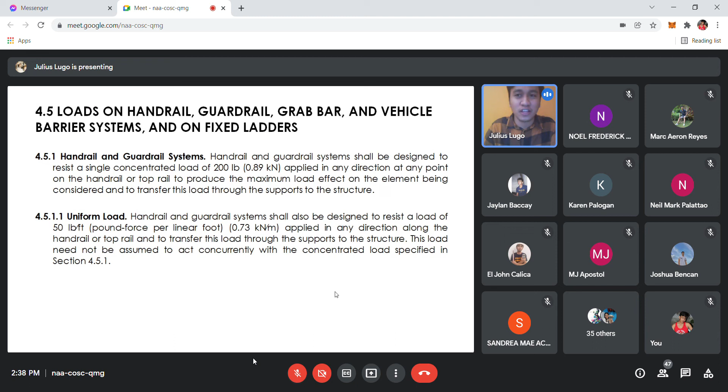Grab bar, mga ganyan. Okay, meron tayong exemption guys. May exemptions tayo. Hindi porket may handrail na yan, yung bahay ninyo, mag-uniform loading na kayo. Wag naman, okay, wag naman.

Okay, so the exemption is yung occupancy ninyo is 1 and 2 family dwellings lang, especially pag bungalow. Kung bungalow naman yan, wag na kayong mag-live load kasi makakamahal lang kayo.

Another thing is factory, industrial, and storage occupancies in areas that are not accessible to the public and that serve as an occupant load not greater than 50.

Have you ever been to S&R? Sino na nakapunta ng S&R? Landers. Oh okay, wala pa nakapunta ng S&R guys. Who knows what S&R is? It's like a shopping or like maybe grocery center, somewhat like that. Pero yung mga binibenta nila is kind of foreign, kumbaga imported goods, mga ganyan. So doon makakabili ka ng Twinkies, makakabili ka ng mga much cheaper version ng Nutella, mga ganyan. Kasi sa mga malls, actually, sobrang mahal ng Nutella. Pero yung doon, sobrang lalaki ng mga Nutella nila, mga ganun, isang galbanan guys. Yung ginagamit talaga, parang wholesale siya na center. Pero membership shopping siya, you just have to pay like 750 ata per year, annually. Pero you can enjoy na yung effortless na shopping and gano'n. So, nagkakaroon, nag-consider, nag-endorse. Ayun.

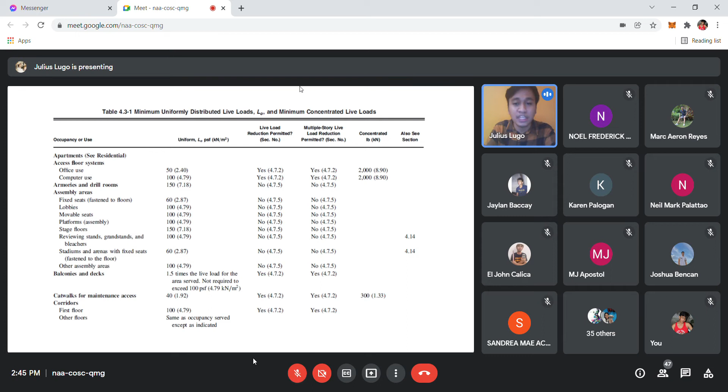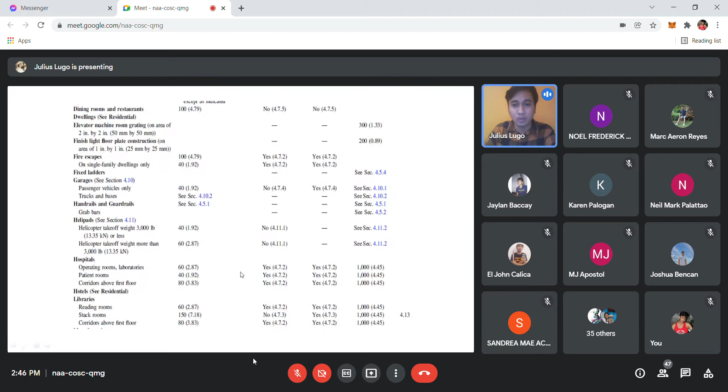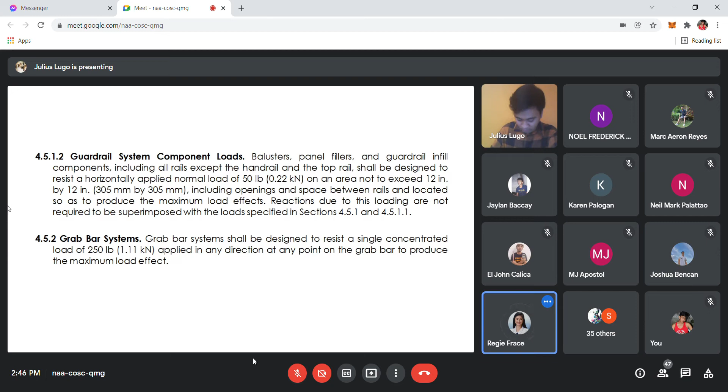Now, for the guardrail system, our component loads include balusters. What do we mean by balusters? Does anyone know? Reggie, what do we mean by baluster? Sir, as I know, balusters are like the handrails in a house. Okay, that's technically what Reggie knows - it's part of the handrail. But as I drew earlier in the stairs part, balusters are actually the small columns supporting the handrails. Those are balusters - part of the handrail or guardrail system.

Then we have panel fillers and guardrail infill components, including all rails except the handrail and top rail, which shall be designed to resist a horizontally applied normal load of 0.22 kilonewton.

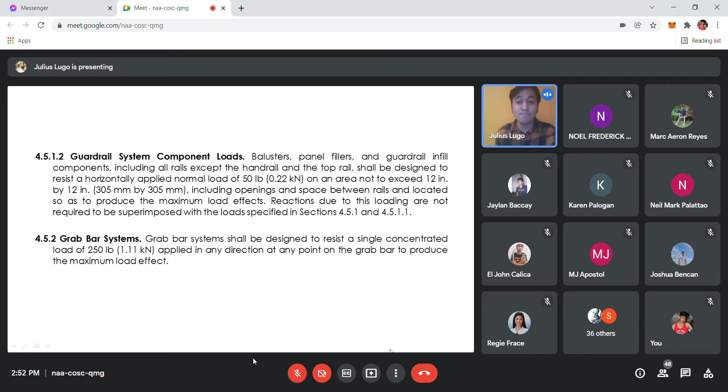So for the grab bar system, it should be designed to resist a single concentrated load of 250 pounds, applied in any direction. This is on top of the 0.73 we mentioned earlier in my drawing. Remember, it should be able to withstand 1.11 kilonewton concentrated live load, applied at any direction, at any point, that produces the maximum load effect.

So we have vehicle barrier systems. Let's just pass through this topic, guys, because we won't be including it in our case study later or in our design. We won't be using the vehicle barrier, because if you were to design your structural framing, we're not going to place a vehicle barrier there. Let's not make things harder for ourselves. Besides, the details not mentioned here...

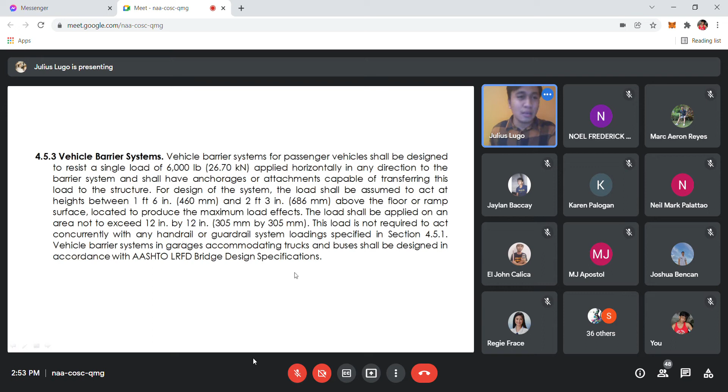Okay, how about fixed ladders? Fixed ladders with rungs shall be designed to resist a single concentrated load of 300 pounds.

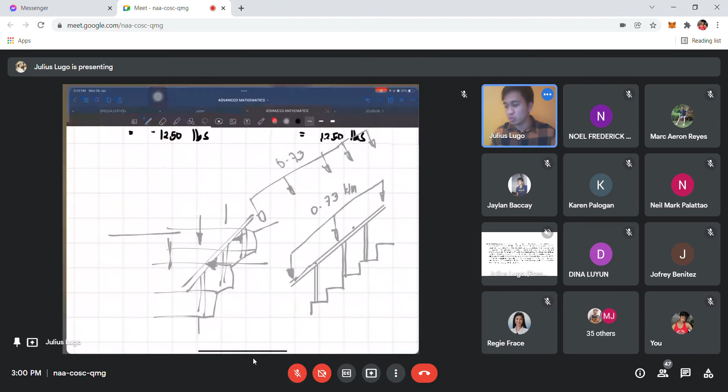I don't understand what... Oh my God, I don't understand what you're saying. Going back, I hope you guys can see the screen now.

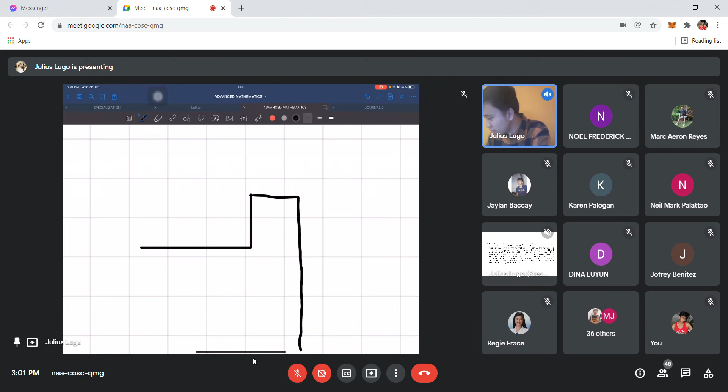I'm going to draw here the section of the building - just a particular section, like the building's balcony. This is the elevation plan. Your stairs, or what you call the ladder, is fixed somewhere here, like that, somewhat in nature.

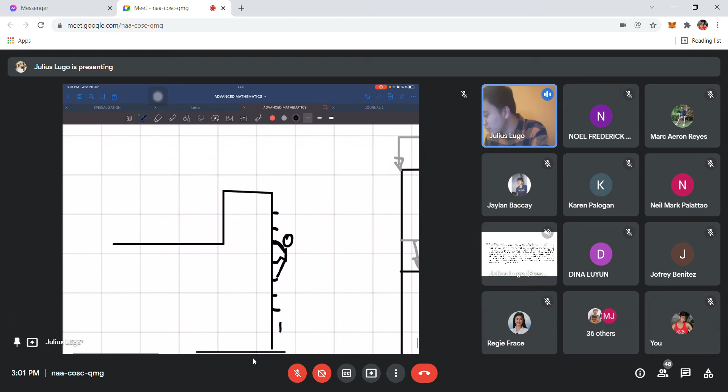For example, here's the person standing like this, holding on here. The railing is somewhat on the side, and then like this. This is what we call the extension of the railing.

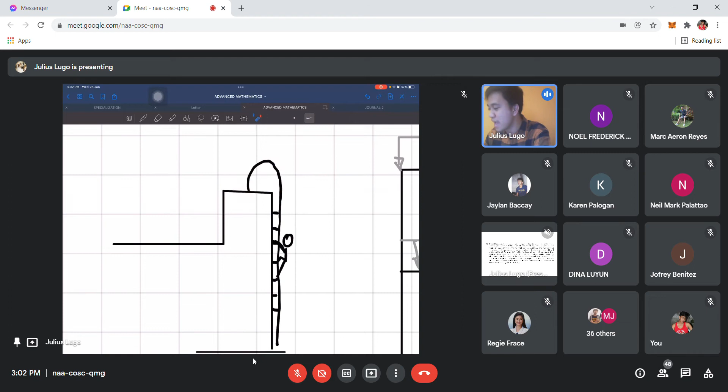This part should be designed to withstand our 100 pounds. When it comes to this other part, that should withstand the 300 pounds concentrated live load.

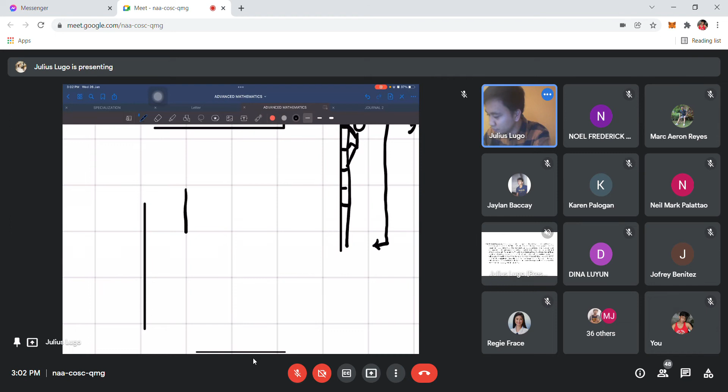Going back to treads and rungs - if you encounter a ladder like this. Let's make it 3D - it doesn't look 3D though.

So somewhat like that is the ladder. The rungs we're talking about look like this - like that. Those are the rungs.

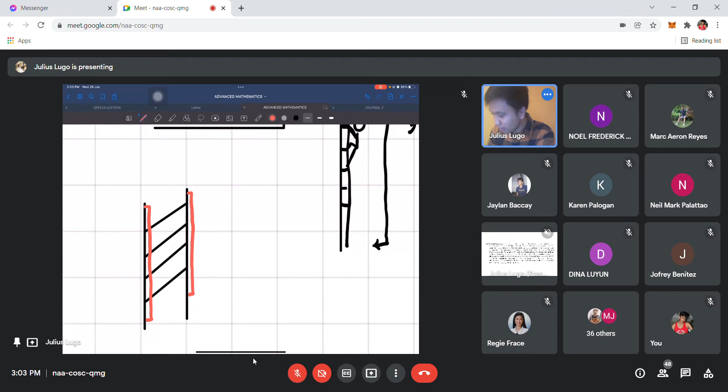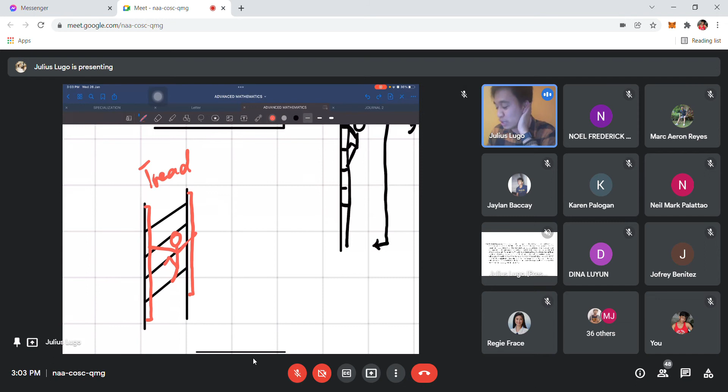Do you guys understand the drawing? So this is your tread, and the circular one earlier is the rung - it's like a ring. So that's your tread and rung.

Moving on, let's continue. Let me just resume presenting. I hope you guys are learning, kahit paano.

Later on, when we do structural analysis, we don't manually input and compute these loadings - it's the software that computes for the loading given this particular condition. We just select which building code to use. That's the good thing about technology nowadays.

Oh my God. So anyway, I hope you can see the screen already. It's 3:04, we're almost done, don't worry.

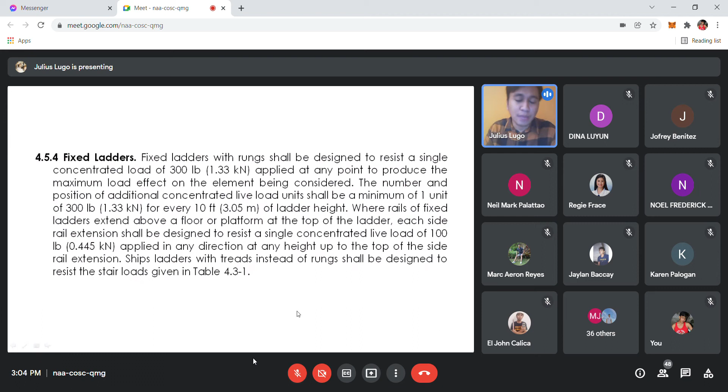Impact loadings - what are these? These are loads that cause sudden vibration. When I say sudden vibration, I'm not referring to the live load. Impact loadings are, for example, bombs or a gas explosion - those are actually impact loads.

So of course, we give allowances for impact loadings - the live loads are multiplied by a certain factor to get the impact loading. Our provision is, if it's a machinery, there's a chance that if we lift or move it, it might be dropped.

So that will actually cause impact loading. Ngayon yung machinery natin, pwede tayong multiply ng 20%, rather mag-add ng 20% on top of the original weight, okay, that is to account for the impact loading.

And then yung machinery natin, reciprocating machinery natin or power-driven units, pwede natin i-factor siya, multiply tayo ng 1.5, okay, to give allowance or ample consideration to the impact loadings. Just in case yung mga malaglag, mga ganyan, or mga pumutok, of course, we have to take note of those.

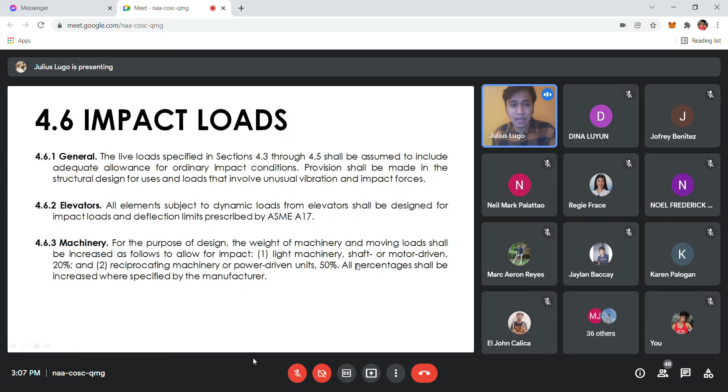Okay, so elements supporting hoist or facade access and building maintenance equipment. Lahat ng structural elements of the building maintenance equipment shall be designed for a live load 2.5 times. I-amplify natin yung 2.5 times na rated load ng hoist, or the stall load of the hoist, whichever is larger.

Now, fall arrest and lifeline anchorages, these are actually safety materials, or tawag dito, safety features, especially in construction. Alam nyo guys, yung pinagtatalian nila ng mga safety line nila kapag sasabit sila, mga ganon.

Pag sasabit sila dun guys, di ba syempre meron silang protective equipment, tapos dun sa anchor, tatali nila doon yung kanilang chain, tapos magkakabit sila ng bintana sa third floor, mga ganon. So parang sabit-sabit sila. Ngayon, itong fall arrest na to and lifeline anchorages, those are those safety facilities.

Ngayon, itong fall arrest and lifeline anchorage should be designed, guys, for a live load approximately 13.8 kilonewton for each of the attached lifeline. Ngayon, it is the duty of the safety engineer to check kung ilang lifeline yung nakakabit dun sa anchor na yun.

Kasi baka malay mo, that anchor is actually specified lang to accommodate 3 lifelines, okay? Pwede lang magkabit ng tatlong lifeline doon and then sasabit yung tatlong tao.

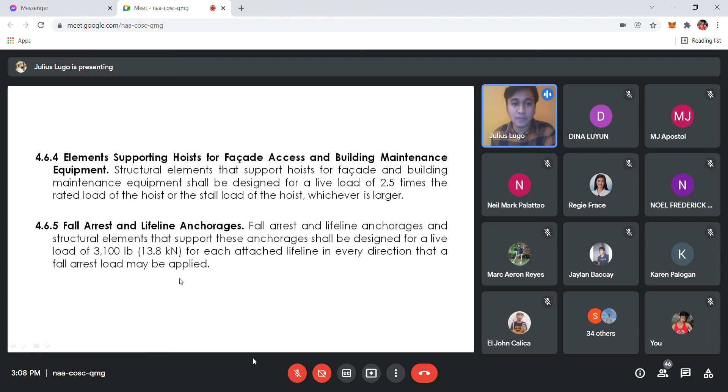Okay? So reduction naman tayo. Meron tayong reduction. Kanina, in table 4.3-1, pwede natin i-reduce yung ating live load and concentrated load. So how do we actually reduce the concentrated live load and the uniform live load? This is how you're going to reduce.

Itong formula na to, gagamitin mo to sa lahat ng live load except yung roof uniform live loads. Okay, take note. Meron tayong separate formula for the roof uniform live loads. Yung reduction ng ating uniform live loads is subject to limitations of 4.7.3 through 4.7.6.

Members for which a value of KLL or AT is 400 feet squared or 37.16 square meters or more are permitted to be designed for a reduced live load in accordance with the following formula.

So first, okay, in computing for the reduced uniform live load, i-check nyo muna yung value ng KLL or AT, product ng KLL and AT. If the product of the KLL and AT is actually equal to 400 square foot or 37.16 square meters or maybe greater than that, pwede kayong mag-reduce ng live load ninyo. Pwede nyo gamitin itong formula na to.

Ngayon, itong 4.7-1 na equation, that's for the British system. Gagamitin natin, SI unit is itong pangalawa. Okay, so L equals LO multiplied by 0.25 plus 4.57 over square root of KLL multiplied by AT. Okay, so ito yung SI na formula.

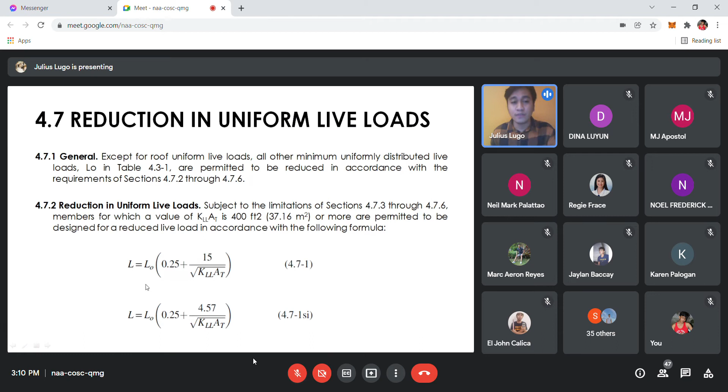Ano ba itong KLL and AT na to? Yung KLL mo, ito siya, live load element factor. Tapos yung AT, A sub T, that's your tributary area. Yung KLL mo, pili ka dito kung interior column ba siya.

Okay, if the structural element supporting the particular live load na gusto mong i-reduce is an interior column, you have to use KLL as 4. Okay? If that particular live load that you want to reduce is actually supported by exterior columns, that is your KLL should be 4.

Now, yung computation ng tributary area, hindi ko na siya i-discuss dito. Kasi the tributary area, what do we mean when we say tributary area, guys? Anyone who knows what the tributary area is? Perhaps I can ask someone. Si Carl na lang, Dominic. Carl Dominic, what is tributary area?

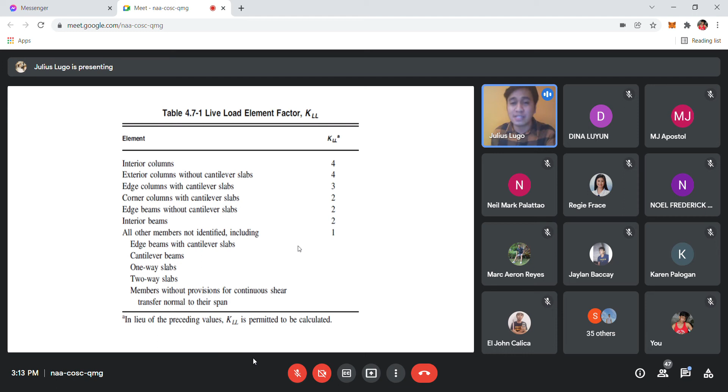The beam, there's a specific area that is being supported by the beam. Hindi lahat ng ceiling mo sinusuportahan ng beam. Hindi ganyan, guys. So yung mga side beam mo, malamang yung mga nandun lang sa malapit sa kanya, yun lang yung mga sinusuportahan niya. So those are your tributary areas.

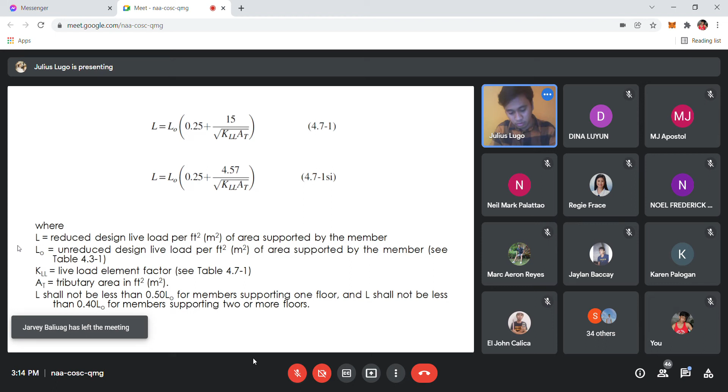Ngayon, upon computation of the reduced live load, hindi agad yon yung ilalagay yung live load. Kumbaga, pagkatapos nyo nag-compute ng live load, i-check nyo muna. You have to check first.

Now, upon computation ninyo ng L, you have to compare the value of the L with 0.50 of the LO. So, L should not be less than 0.50 for members supporting one floor. And L shall not be less than 0.40 for members supporting two or more floors.

So, there are some columns kasi na although 3-story building siya, yung column na ito, ang sinusuportahan lang niya or hangganan lang ng column na ito is hanggang sa second floor. So, yung mga ganyan guys, mga ganun na type ng column, hindi siya full force. Meron din mga column na although 3-story yung building, first floor lang yung hangganan ng column na yon.

So, you have to check. If your column only supports one floor, then you have to check the value of the LO or 0.50 LO, and compare that with L. Ngayon, if your L is less than 0.50, ang gamitin mong LO or ang gamitin mong value ng reduced value ng inyong live load is the 0.50 LO. Same goes with this particular value, the 0.40. Okay, so that is how you're going to check the reduction factors or the reduced equation.

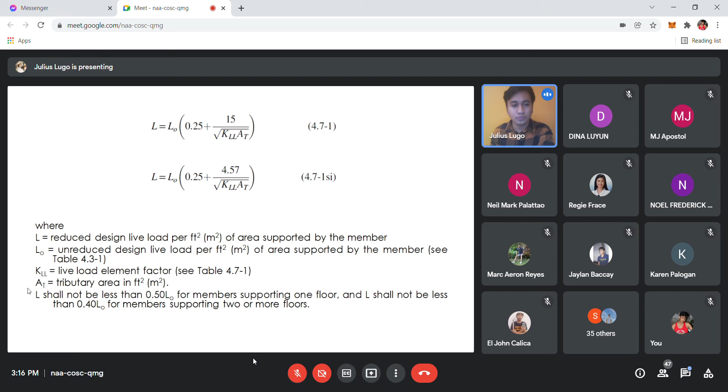Meron din tayong heavy live loads. Yung mga heavy na yan, those are somewhat heavy. Hindi kasi na-specify sa code guys kung ano yung mga heavy live loads na to. Perhaps it is vehicle, ganyan. Pero may separate provision kasi yung vehicle. So hindi na separate kung ano yung mga heavy, hindi na specify kung ano yung heavy live loads na ito.

Pero in the case of heavy live loads, ang nailagay lang is that yung mga live load na greater than 4.79. So, hindi na i-specify kung anong type siya, is it a machinery, is it a vehicle, hindi siya na-specify. So, ang in-specify lang is yung loading. Heavy live load daw siya kapag ang live load ay actually greater than or equal to 4.79. If your live load is 4.79 and above, you don't have to reduce it. There's no reduction that's going to happen. Retain nyo yung live load na yan.

Meron din tayong exceptions. Live loads for members supporting 2 or more floors are permitted to be reduced by a maximum of 20%, but the reduced live load shall not be less than L as calculated in 4.7.2. This formula. So you can reduce the live load for members supporting 2 or more floors by 20%. Multiply mo na lang ng 20%, but it should be in accordance with the provision of section 4.7.2. It should not be less than L using yung ating formula.

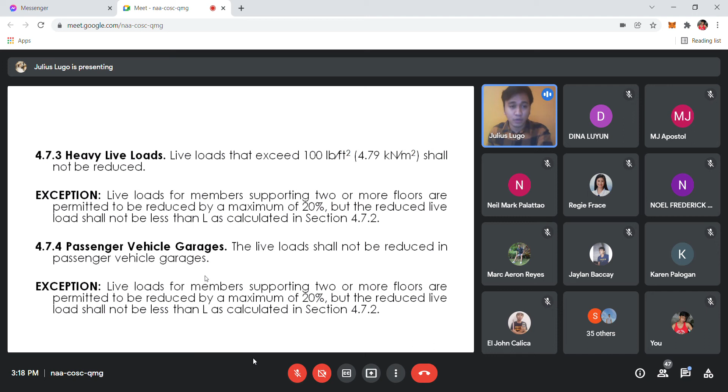Next, passenger vehicles. We will not be discussing the passenger vehicles anymore because we will not be having vehicles naman for our structural modeling. Assembly, okay, kahit wag na yan.

One-way slab and two-way slab. Have you encountered one-way slab and two-way slab? Have you encountered one-way slab or two-way slab already? Hindi niyo pa na-encounter guys ang one-way? Wala pa kayong na-encounter na, o may narinig na ba kayo? May narinig na ba kayo na one-way slab and two-way slab?

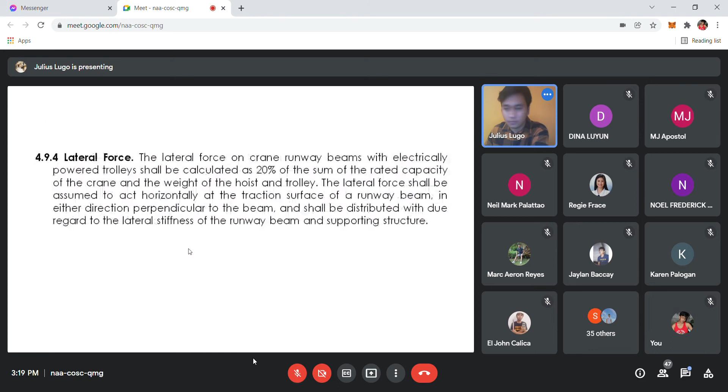Ang dami pa pala nito. Okay, anyway, papasadahan lang natin yung iba. Okay.

Okay guys, yung one-way slab ay yung mga slab na there are only two beams supporting both sides, dalawang beam lang. Two-way slab naman siya kapag lahat ng sides ng slab na yun is supported by a beam. So pag one-way, two sides lang yung may support; pag two-way, lahat ng sides ng slab ay may support, may beam siya.

So the tributary area for one-way slab shall not exceed an area defined by the slab span multiplied by 1.5 times that slab span. So that's L multiplied by width, which is 1.5 by 1.5 multiplied by the L itself, the length. Yun yung limitation on one-way slab, yung tributary area.

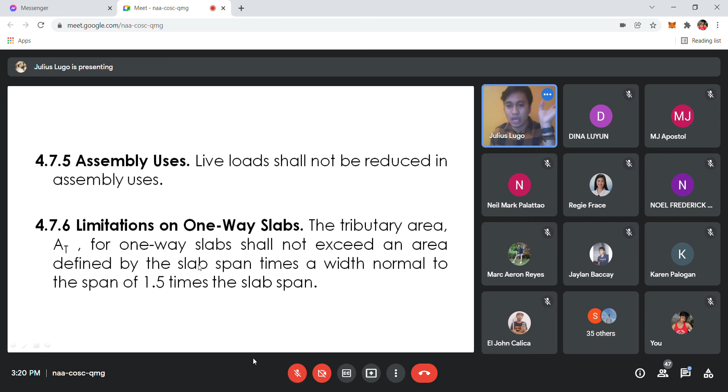Okay, so meron tayong reduction for roof live loads. Minimum uniformly distributed roof live load should be in accordance with table 4.3-1, and can be reduced with the requirements of section 4.8.2.

Okay, so pwede tayong mag-reduce ng live load for the roof. Pero kung your uniform roof live load ay na-reduce ng approximately or less than 20 pounds, pwede yung roof live load na yon - for example if you're going to reduce it to 20 pounds or 0.96 kilonewton per square meter, in order for you to make easy calculation.

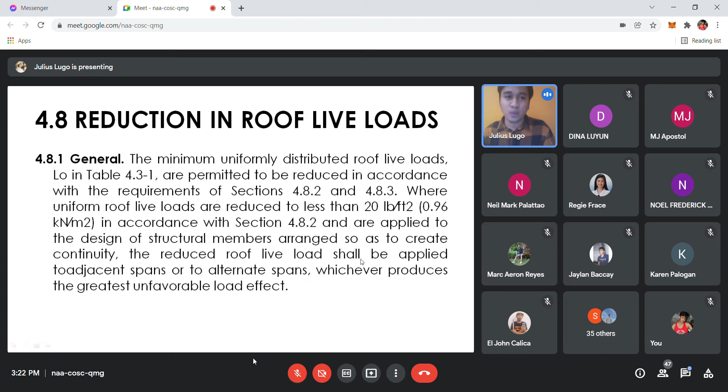Kasi sobrang dami, di ba, if you're going to calculate roof live load for this particular building, yung roof live load na yon at that specific purlin and truss member, pwede niyo siyang copy-paste na lang sa mga susunod na member, regardless kung ano yung form o shape ng roof ninyo. So if the live load is just reduced to less than 20 pounds, you can copy-paste na lang yung mga yon into the alternate spans of the roofing - wag na kayo mag-compute pa ng live load ninyo. That's just the general provision.

Ngayon, yung ordinary roofs, awnings and canopies ninyo, kung flat especially, pwede tayong mag-reduce ng live load gamit yung equation na mapapakita later. Pero if it is not specified - other unspecified roofing types - kailangan natin mag-consult sa authority having jurisdiction. So kung hindi siya ordinary flat, pitch, and curve roofing, awning and canopy, you have to consult the authority having jurisdiction.

On such structures, the minimum roof live load shall be 0.58 kilonewton per square meter. This 0.58 kilonewton per square meter should only apply to greenhouses or similar structures.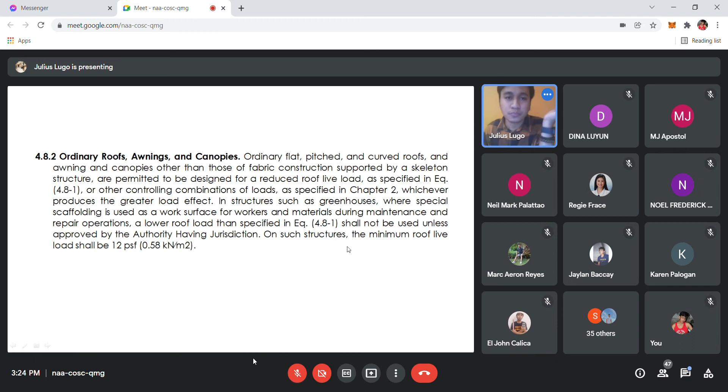Greenhouse, mga ganon, yung mga facility na may scaffolding, you can use 0.58 na lang. Pero yung structure ninyo na may roofing mismo at walang scaffolding, well, you have to use yung specified loading conditions sa mismong table 4.3-1. This 0.58 kilonewton per square meter only applies to greenhouses and similar structures with scaffoldings or supports.

Ngayon, ito na yung magiging reduction ninyo - this is how you're going to reduce the live load for that particular roof. Focus na lang tayo sa second equation kasi ito yung SI. Yung LR ninyo is equal to LO multiplied by R1 and R2. R1 and R2 are the reduction factors. Yung LO ninyo ay taken from the table, and ang LR ay yung reduced value. Okay, so you have to check as well.

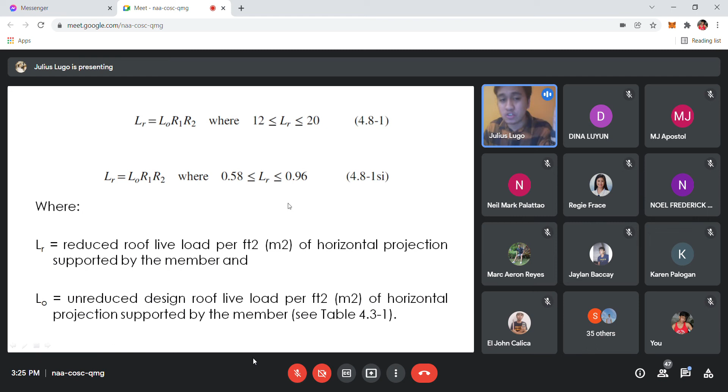Yung LR dapat ninyo, kapag ito yung gagamitin na formula, ay greater than or equal to 0.58 but less than or equal to 0.96. Now, in determining the value of your R1 and R2, we use this formula - check nyo lang kung yung tributary area is less than or equal to 200 feet, greater than 200 feet but less than 600 feet, and then greater than or equal to 600 feet. Yun yung value ng R1 ninyo.

Yung R2 naman ninyo, wala nang conversion na magaganap dito, guys, ha, kasi ang specified dito is in feet. So you have to convert your metric units, kapag metric units yung binigay sa problem, into feet.

Pag nakuha nyo na yung value ng R, hindi nyo na kailangan i-convert. Isubstitute nyo na lang sa second formula. Okay, so ayun yung conditions na dapat matugunan pag kino-compute natin yung R1 and R2.

Ito naman yung F natin, that's the slope, the slope of the roof. So check nyo lang later on kung ano yung gagamitin nyo. I-check nyo muna yung tributary area, if it is less than or equal to 200 feet, yung R1 ninyo is 1. For the slope naman, if it is less than or equal to 4, you use R2 as 1. So yun lang naman guys, yung conditions ng reduction factor natin, R1 and R2.

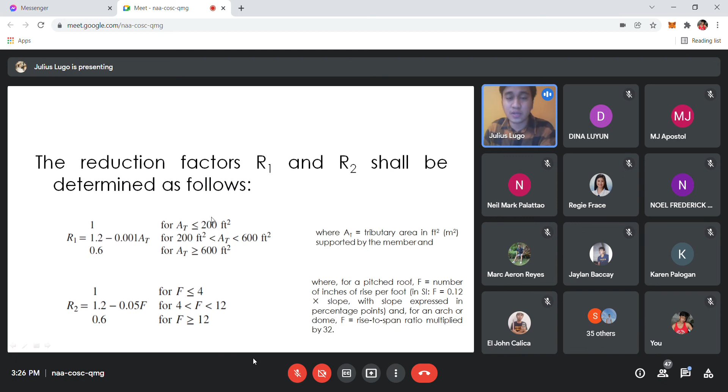Okay, crane loading, huwag na tayong mag-focus dyan. That's just part of the general section of the live load, pero hindi naman tayo nag-crane sa ating design later on.

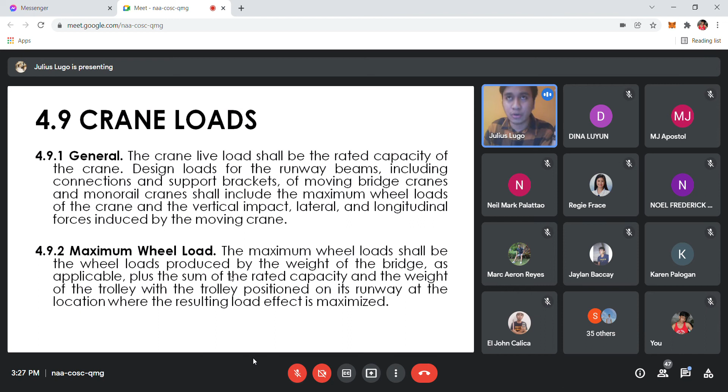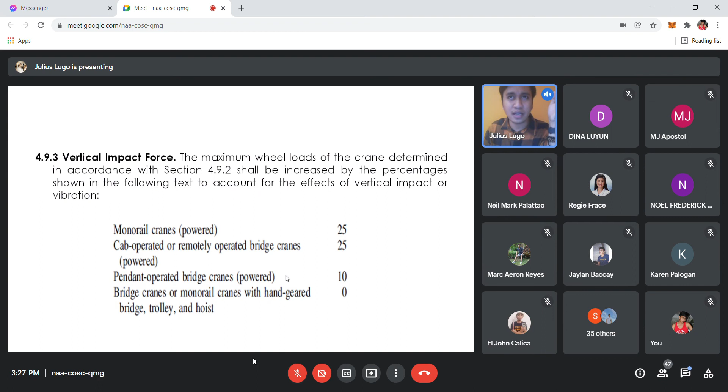So meron din tayong wheel loads, pero hindi na natin yan i-discuss masyado kasi these are parts of the crane na. Okay, lateral forces, wag na din, longitudinal forces, wag na din. Kasi sa bridge na yan, mga cranes.

Garage loads naman. Kapag garage, yung mga floor natin, especially if your garage is somewhere in the second floor or third floor, somewhere above the ground, it should be designed for the uniformly distributed live load stipulated in table 4.3-1, or the following concentrated load.

So pwede kayong gumamit ng table 4.3-1 o pwede rin itong case na ito. So the first case, if yung passenger ng vehicle is actually not more than 9 passengers, you can just use a live load. Ito yung guys, kung natatandaan nyo pa yung mechanics of materials ninyo, yung moving loads, ito yung application nun. So kung may vehicle kayo with not more than 9 passengers, maybe a van, mga maliit na van, pwede kayong gumamit ng 13.35 kilonewton, acting on an area 4.5 inches by 4.5 inches.

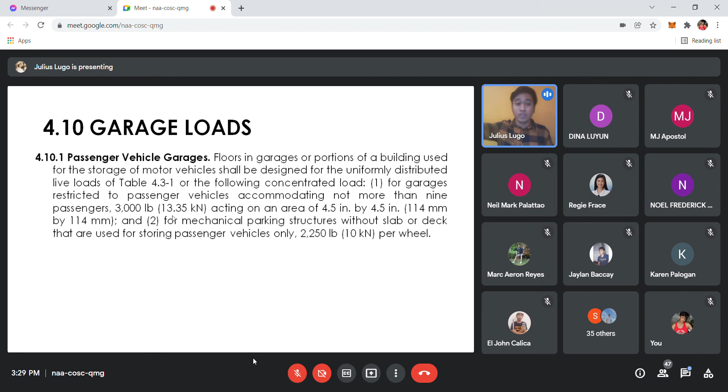Meron din tayong mechanical parking structures without slab or deck that are used for storing passenger vehicles only. Ngayon, yung live load naman ninyo is 10 kilonewton per wheel. Ito yung mga mechanical parking structures na yan, yung nakikita nyo na parang nagro-rotate. Papark lang yung sasakyan doon, tapos pwede ka nang umalis, itatago niya yung sasakyan. Mga ganun. I think you've seen that one na.

Trucks, bus, garages - well, we won't really be working on this one because this is under the AASHTO LRFD, kasi medyo mabigat na itong mga to, guys. So wag na tayong maglagay ng ganyan sa ating mga design later on.

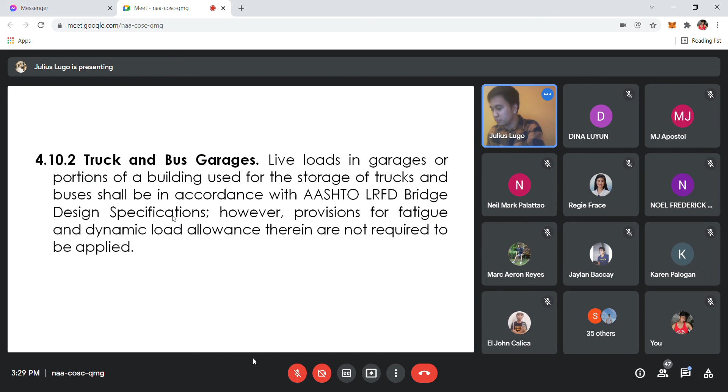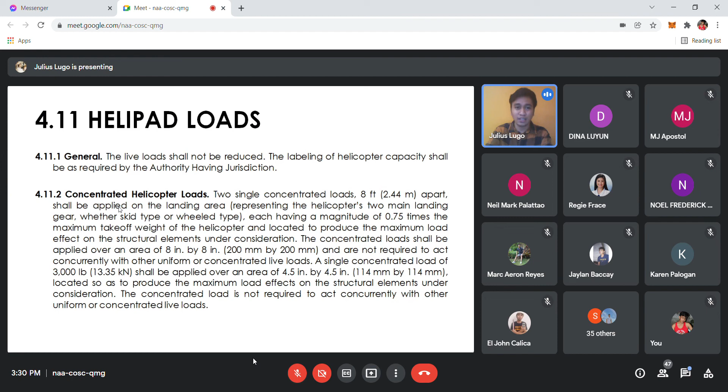Next is helipad. Meron bang gusto maglagay ng helipad dito? Kahit muna natin i-discuss yung helipad, kasi wala naman atong mag-helipad sa inyo. Okay, kasi this is very complicated to discuss to you, and I believe I'm not the right person to discuss to you the helipad loading. Although it's just similar to the truck loads, mga ganyan. So kahit pasadaan na lang natin yung helipad.

So meron tayong uninhabitable attics. Ano ba ito yung mga uninhabitable attics na to? Ito yung mga hindi kayang pasukan ng tao. Meron tayong mga attics - it is uninhabitable if the height from the floor ceiling to the roof is 42 inches. If it is 42 inches in total height, that is an uninhabitable attic.

So parang for the sake of storage na lang guys yung attic na to. Hindi siya pwedeng lagyan ng bedroom, mga ganyan, for storage purposes lang. Gagamitin mo ngayon yung live load na nandyan sa 4.3-1. And it doesn't necessarily mean na you're going to put the uniformly distributed live load concurrently with other live loads there. So that's your uninhabitable attics.

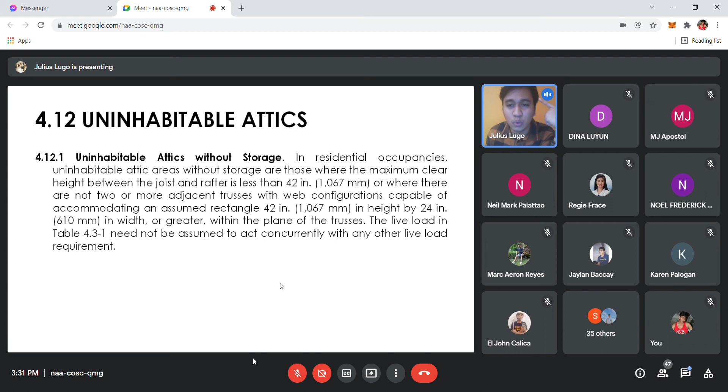Especially if you have materials being stocked in the attic, hindi kailangan na i-superimpose mo yung live load nila. So ito yung uninhabitable attics with storage. Meron tayong standard height - kung ano man yung height nila from the ceiling floor to the truss ng attic.

Okay, ayan na siya. Pakibasa na lang to later on. Ito lang naman yung mga provisions niya.

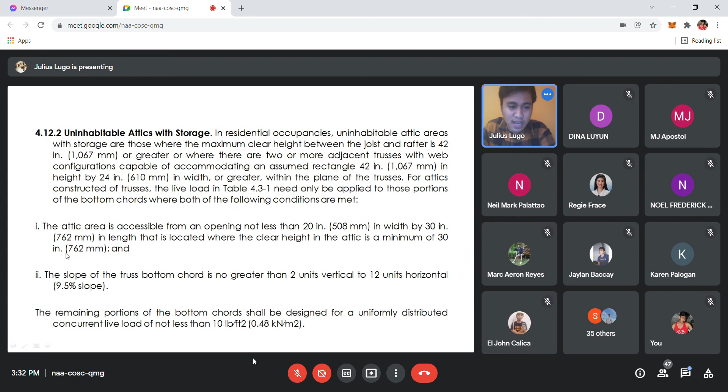So library stack rooms naman tayo. If you have a library, yung mga stock natin, yung mga bookshelf natin, those are actually what we call the stack. Yung ating library stack is designed, or yung live load niya is provided in table 4.3-1. Meron tayong limitations kung double-faced yung library natin. So the nominal book stack unit height shall not exceed 90 inches or 2,290 mm, approximately 2.29 meters. If the height of your stack is 2.29 meters, pasok siya dito sa live load condition natin. Then the nominal shelf depth shall not exceed 12 inches. So yung sinasabing depth dito is yung lapad niya. So yung height niya is 2.29 and yung lapad niya is 12 inches dapat, kasi magkabila ang book na ilalagay mo doon.

And if you have parallel rows of double-faced book stacks, similar to our university library, yung space in between those stacks should be not less than 36 inches. So yun yung sa pagitan ng dalawang stack.

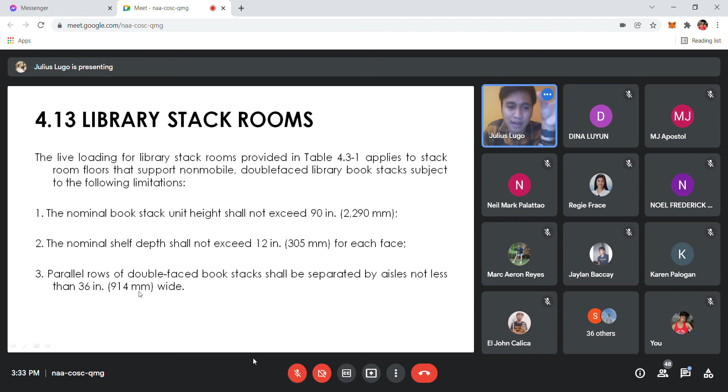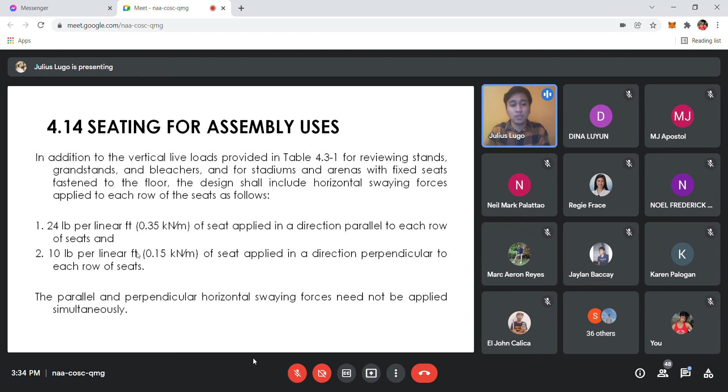It's 36 inches. So for seating assembly naman, ito guys, yung seating assembly na yan, yun yung mga nasa parang PICC, na magkakatabi yung mga seat, at naka-position by rows and columns yung seat. So if that is the case, pwede tayong mag-apply ng 0.35 kilonewton per meter doon sa ating row. Wherein sa column naman natin, 0.15 kilonewton per meter naman siya. So yun lang naman yung setting for assembly uses.

Sidewalks, driveways, and yards subject to trucking - hindi na tayo magta-truck loads, guys, so pasadahan na lang natin to. Make sure lang na wala kayong...

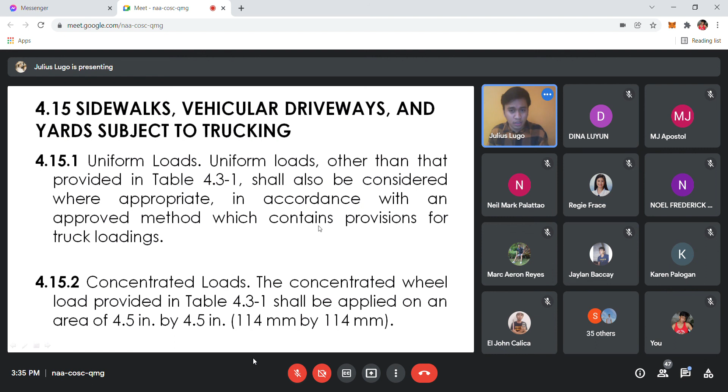Okay, kapapasok na lang kasi Jer. Anyway, okay, going back. The concentrated live load. Anyway, wag na kayong maglagay ng mga truck guys later on sa mga models ninyo. At simple framing plan is good enough for me.

Okay, wag na tayong maglagay ng complicated na moving loads doon. So stair treads naman tayo. The concentrated load on stair treads provided in table 4.3-1, for stairs and exit ways and for stairs in 1 and 2 family dwellings, shall be applied on an area of 2 inches by 2 inches. So this one is concentrated live load. Apply nyo siya sa 2 inches by 2 inches na area, as specified in table 4.3-1.

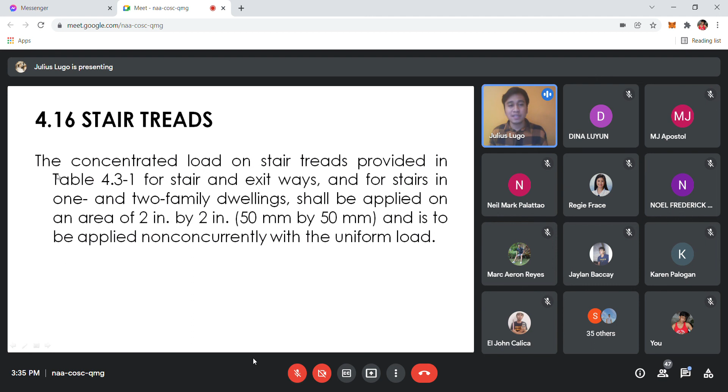Solar panels, those are part of the roof loads. If you have a solar panel, you can actually use 4.3-1. But if your roof live load is not covered, it need not be applied to the area covered by solar panels. If the clearance between the roof and the solar panel - kasi yung solar panel guys, medyo elevated siya - if the solar panel is nakapatong sa roof mo, there's no need for you to apply the roof live load, if the distance between the roof and the solar panel is 24 inches or less. So kapag ang pagitan ng solar panel at ng roof mo is less than 24 inches, you can just use the solar panel loading stipulated in 4.3-1. No need for roof loads na, just the solar panel loading.

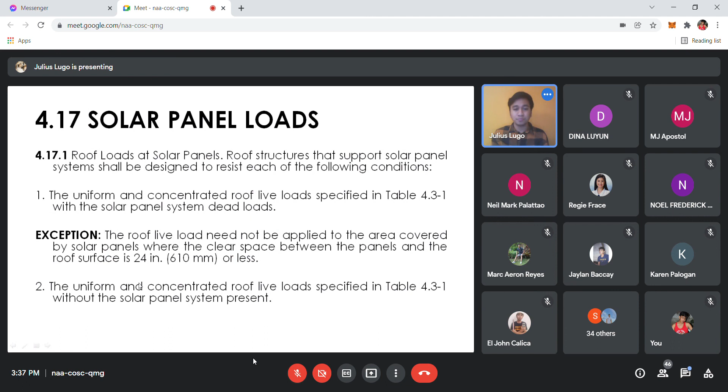Load combination tayo. Of course, you already know the load combination, yung mga 1.2, 1.6. So the load combinations for the roof loading is stipulated in week 1 na discussion natin.

And then open grid roof structure supporting solar panels. Well, if there are so many solar panels on your roof, it's a grid - magkakatabi yung solar panels in concrete pattern. So yung magiging roof, yung inyong uniform live load, or uniform roof live load, shall be permitted to be reduced to 0.57 kilonewton per square meter. Yan yung concentrated load, at yung inyong distributed loading. So just take note that you have to check yung distance ng solar panel from the roof always.

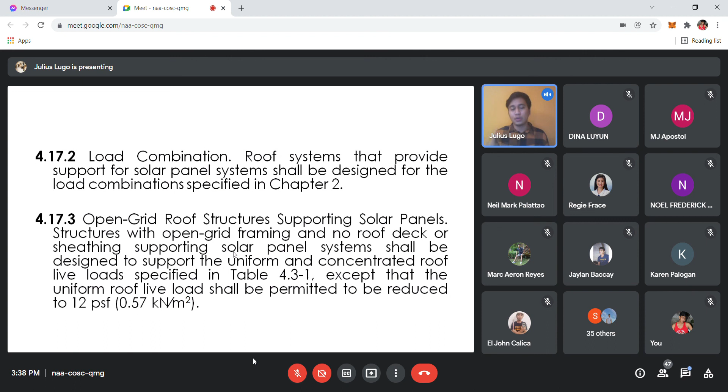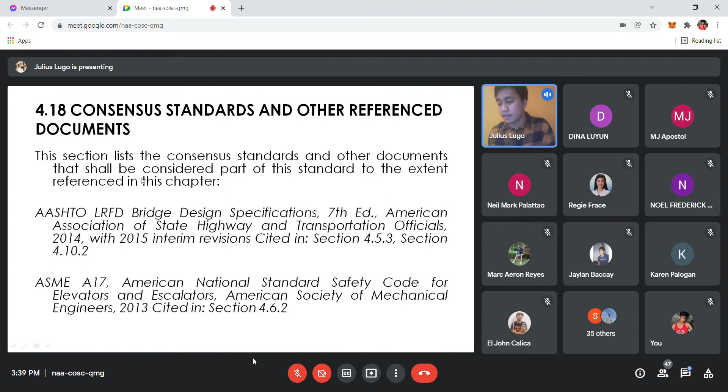Are there questions, clarifications? None, sir. None. Ay,